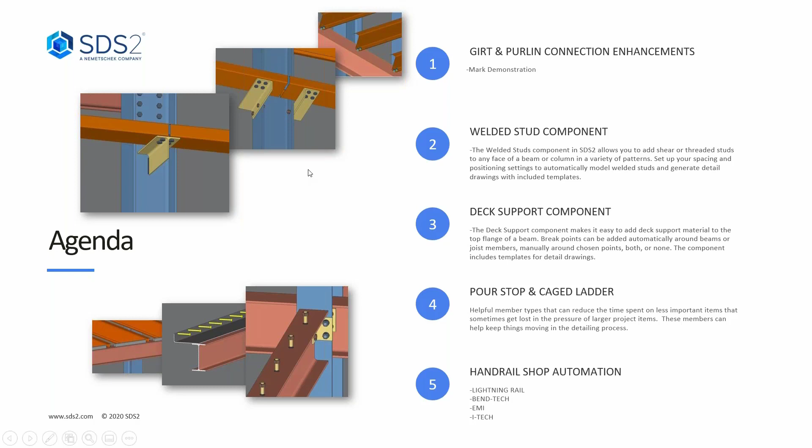To give you an idea, for the Girt and Purlin enhancements, we have all new connections with the Girts. That includes the bolted WT angle, welded WT angle, and welded rotated column flange and toe connections that are really awesome, super versatile, and again everything is really user friendly. For the Purlin connections, as listed, there's the plain and bolted plate, and angle overlap wing plate.

So without dragging this out too long, I'll go ahead and turn it over to Mark for his demo. All right, thank you Nate. Let's get into this.

We will start out by modeling in the new Girt member. I've already offset a line to the building line for the points to pick when adding in our Girt members. When you are modeling in the new Girt member, you will want to model it in a counterclockwise direction around the building. I'll go to my members, add, I have Girt, and I'm going to pick my intersection of construction line to intersection of construction line.

I can come to the section size to browse for what material type I want to use. You are able to use wide flange, channel, cold form channel, and cold form Z. I also have my toe direction here that I can fill out.

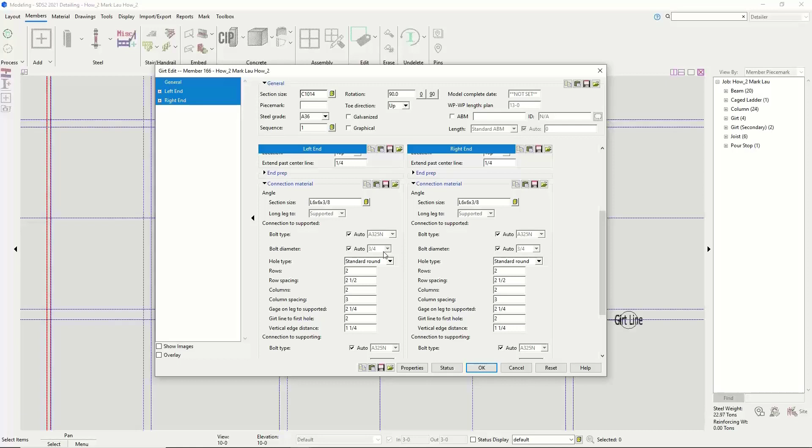Next, we'll come down to the connection type. With the new Girt member, it is not a system design connection, but it is a user input connection, where the user has control on what type of connection they want for the Girt. If I drop this down, we can see that we have angle, plate, and WT for connection types, and we'll look at the different connection types here shortly. You also have options for the attachment, the attached to, and then the connection material, and if you're having bolts and/or welds, you have control of that. I will go ahead and hit OK here.

And then I'm going to continue picking down the line here.

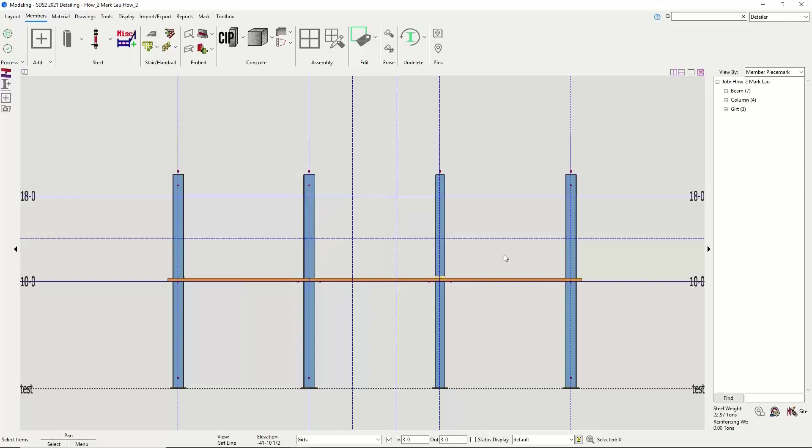And I will leave these the same values I had before. So now that I have my girts in, maybe I want to copy them up to a different elevation. So I'm going to go ahead and open up my grid line, called girt line here. And I can change my selection filter down here at the bottom. I can change that to girts and then be able to select my girts here. And I can copy the members.

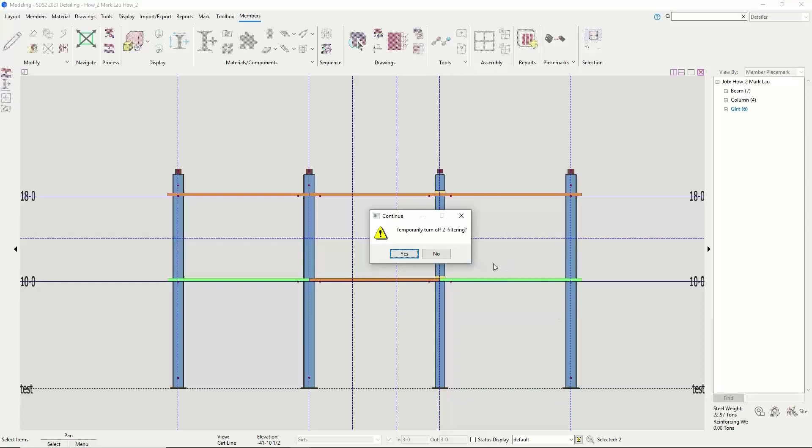Going to pick my point here, and I'm going to go up to my 18-foot elevation, confirm the copy, and then see that I have them here. Now maybe I want to copy just these outer two. And I'll just come up here, confirm my copy.

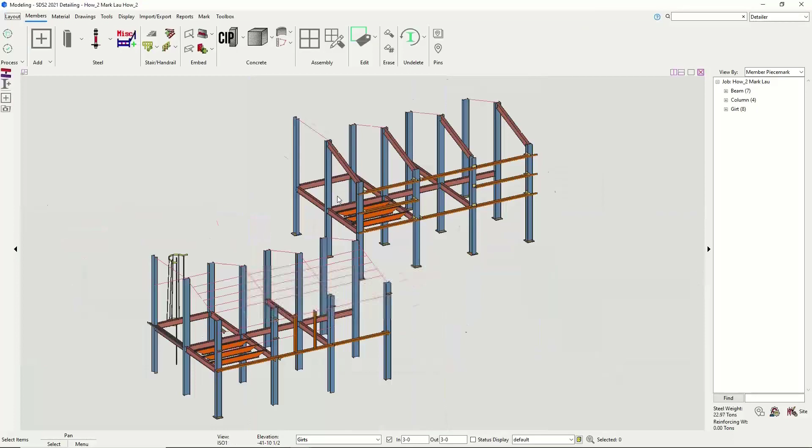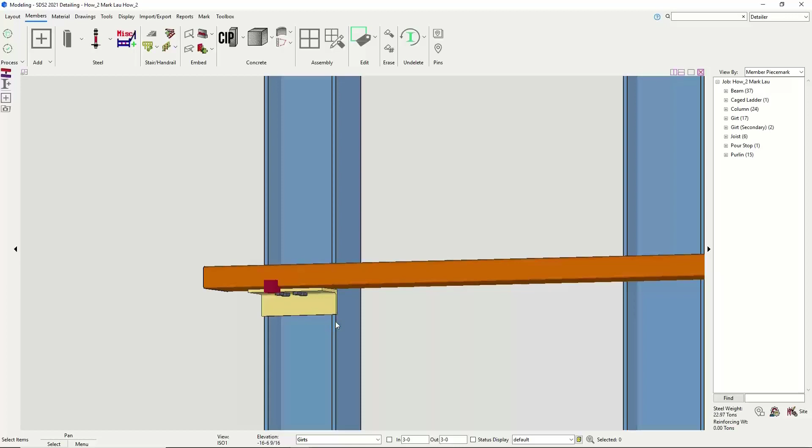So with all of my connection types here, I'm going to open up a different view here to show examples of my different connection types. So I can come in here and see that we do have an angle that is on the bottom side that is bolted to both the flange of the column and the girt. You can control which side of the connection, top or bottom. Here I have an angle that will go to the toes of the column. You can set up the weld type, and then it's bolted here.

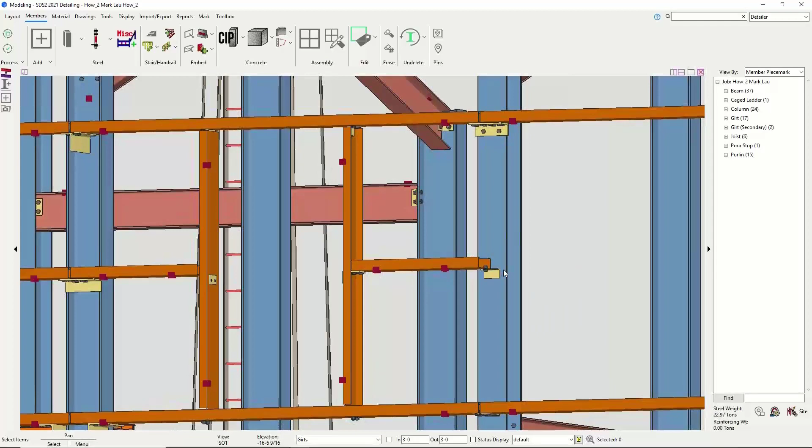Next, we have a WT where it is connected to the web of the column right now, but you can also have it attached to the flange of the column. Next, we have just an angle welded on here for the side. And then we also have a plate connection that you can use. I'm going to go back to the view that I was working in before, my girt line.

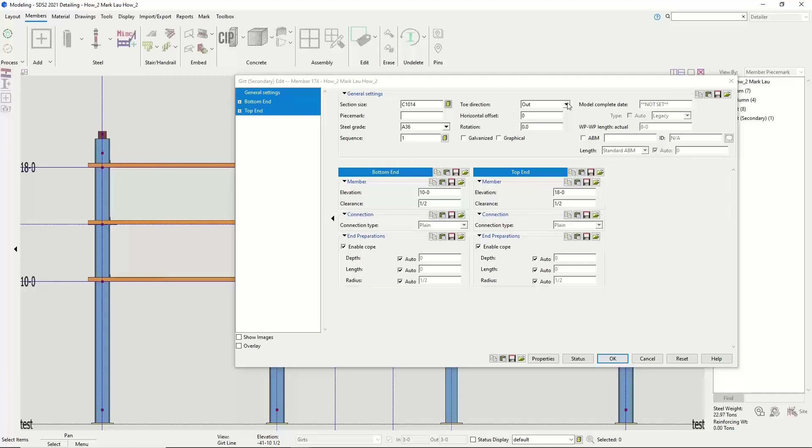And now we will talk about adding in secondary girts. So I can come up here and be able to add in my secondary girt member. And this will allow me to have connections to girts, and then also from girts to secondary girts. So I might come in here and just do the same connection type. For the materials, you have the same as the girt. You have the wide flange, the channel, the cold form sizes as well. You do have a toe direction here, so I'll leave that as out. And then you have your connection information.

And then I'll go ahead and pick my point here again and change my toe direction. So in this case, for my opening, maybe I want to come back here and add in girts to support it here in the middle. So I can just come in like we had done before. Click OK.

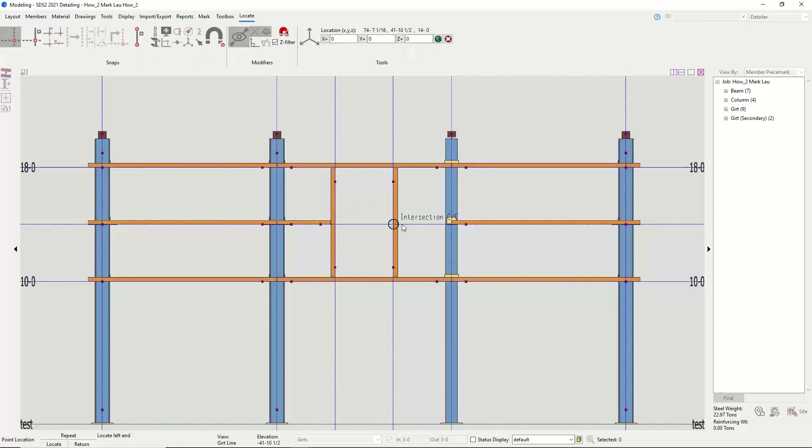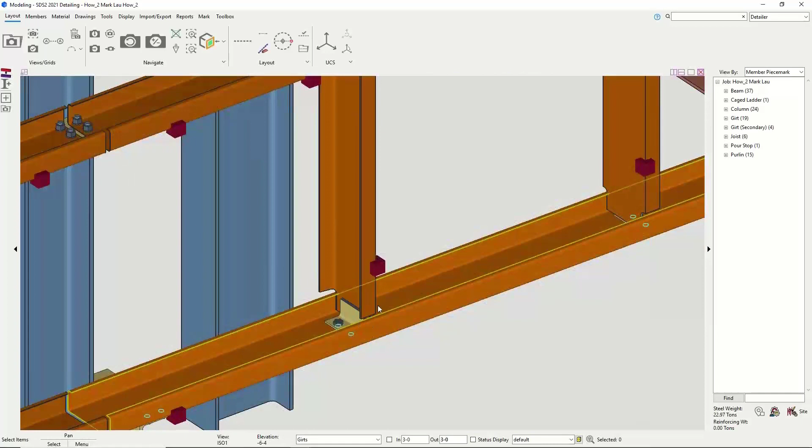Okay, now to show examples again here, I'm just going to open up my ISO view to show the examples where you can see that it does notch out around the girt there for the secondary girt, and I've got a clip angle connection in here, and then I can also get my connection here to my secondary girt.

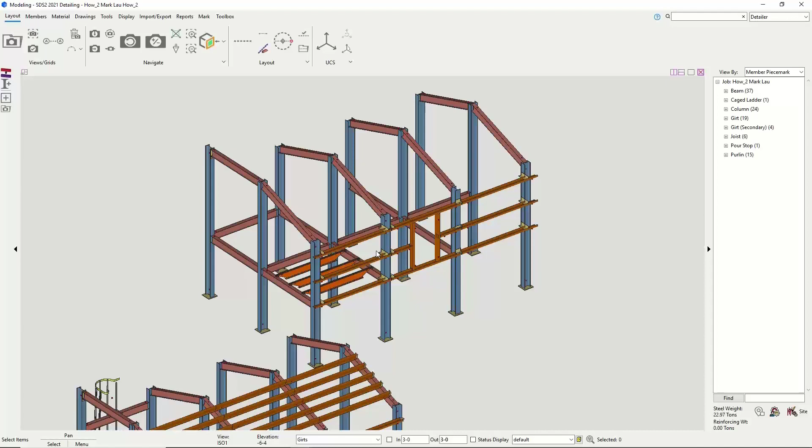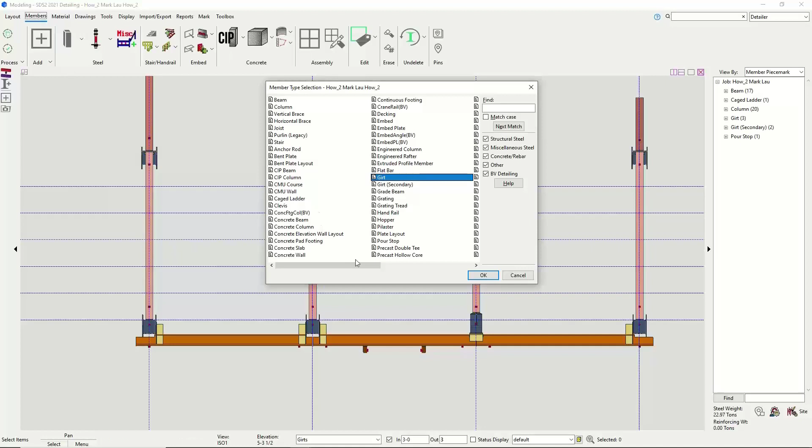Next, we will talk about modeling in the new purlin member. So with the new purlin member, the member line or the points that you pick are going to be on the bottom side of the purlin so that you are picking on top of the beam flange here. I have a sloping roof, so I'm going to snap to the top of the flange to be able to model in my purlins. I will come up here and go to my member add. And I have my purlin member to be able to add.

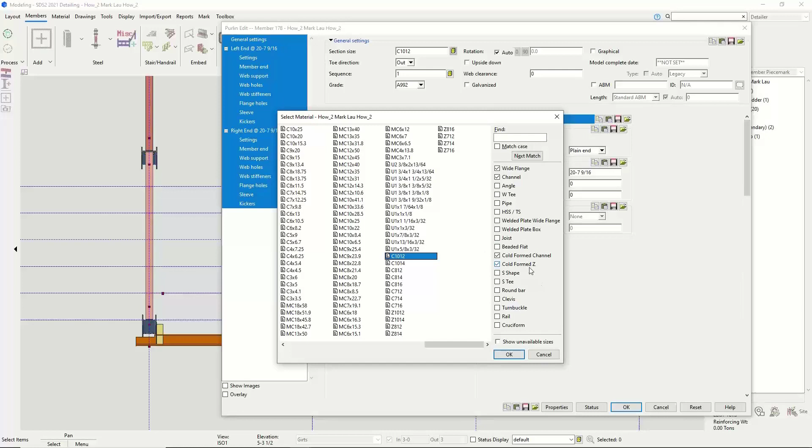And in this case, I'm going to use the point locator of intersection of construction line and member, since I have a sloping beam, to be able to pick my points. For the material types here, I have wide flange, channel, cold formed channel, cold formed Z. I'm actually going to come over here to the Z, click OK. I do have a rotation here for it. I do have a toe direction in or out. And then I have my different connection types.

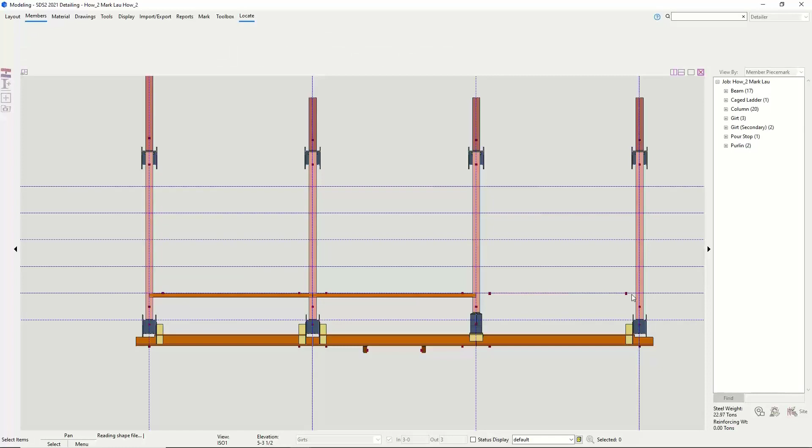So like girt, the purlin member has connection types now. It is not a system design connection. It is a user input connection where you have control over how you want the connection to be. So you have bolted, plate, angle, overlap, wing plate. I will show you some of these examples here shortly. For right now, I'm just going to go bolted. And then I can continue modeling down my bays here.

For the next one, I'm actually going to span over 2 bays and have it go over the top of that beam. And we will talk about being able to connect that here shortly. So I'll just go ahead and leave everything as default like it was before and finish out this line here.

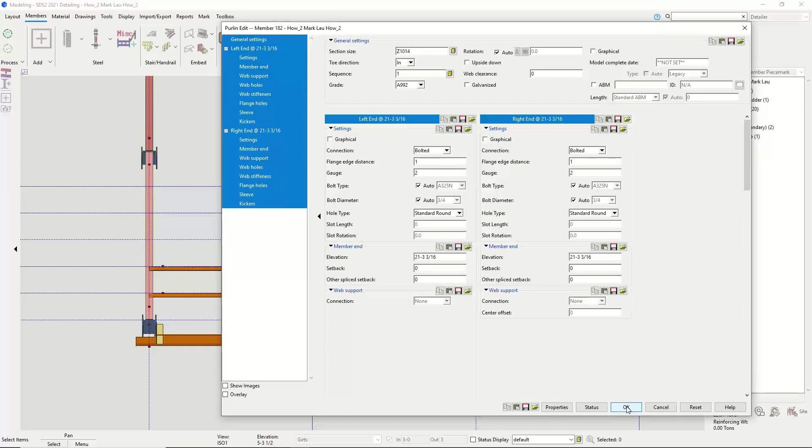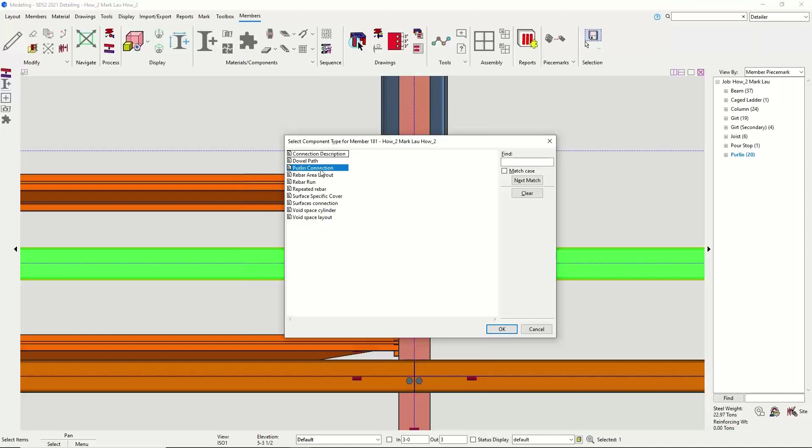So now what I can do is come in here, and if I take off my depth check, you can see that I do not have any sort of connection here. So if I select my girt here, or my purlin, I have the option to add a component. I have a Purlin Connection component that I can add, and then it's going to have you pick a point where you want to be able to add it. And then I have my different connection information that I can do.

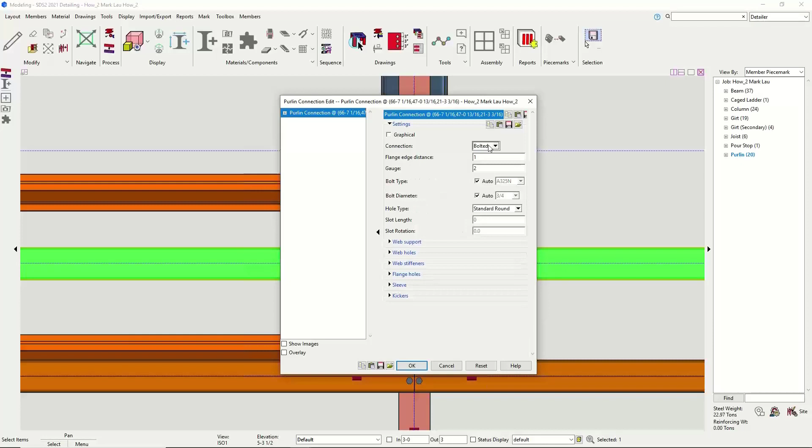So just like in the Purlin edit window, I've got bolted, plate, angle, and then you have some different options that you can use there. So I'm going to leave mine as bolted. Go ahead and hit OK. And you can see that I got my connection bolted in here.

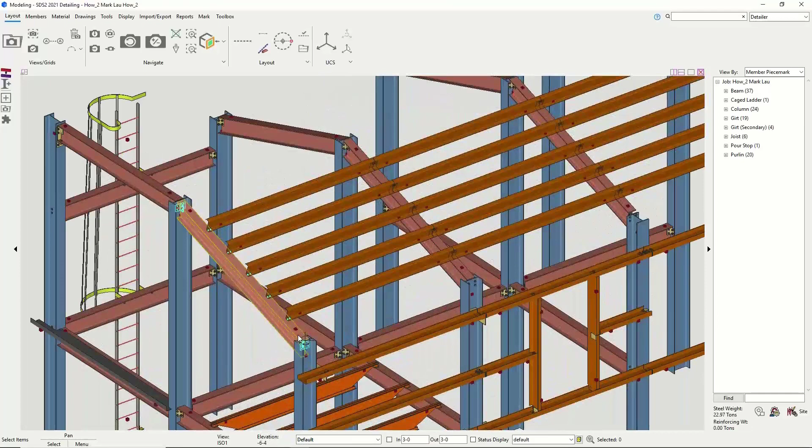So to be able to show some different connection types here for the purlin, I'm going to open up a different view here and just talk about some different ones. So I've got the bolted like shown before. In this scenario, we have the plate connection for the purlin. And then down here at the end, we have a wing plate that you can use for the end of the purlin there.

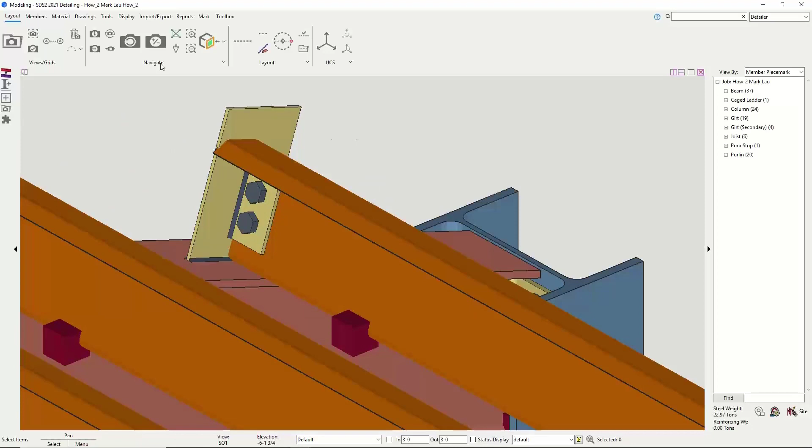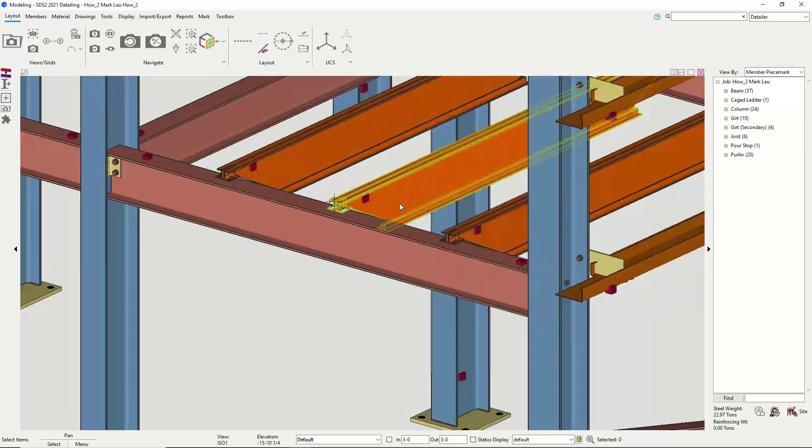Next, we are going to talk about adding in the deck support component. So I'm going to come in here, and in this situation I have my beam and I've got some joists where I need to have that deck support put in. So I will select my beam, and then I can do my component add, and I have deck support.

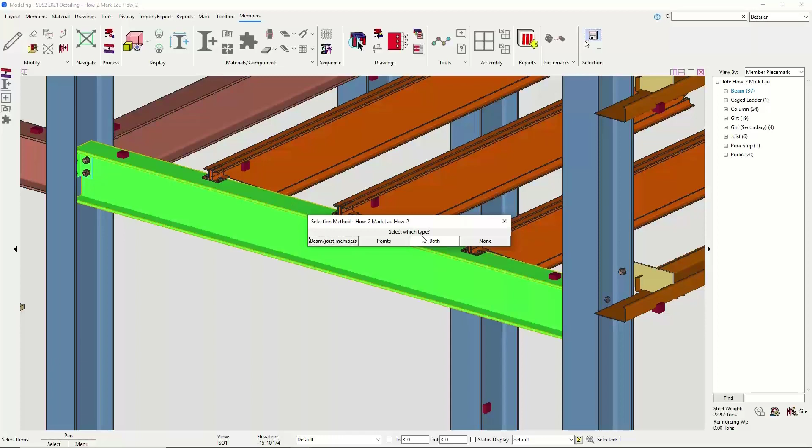Now what it's asking is select selection method for beam joist members, which means that I can select if there's any beams or any joists framing into this beam that I selected. This is where I can have the split of the deck support. I can do points where I can just pick my points for how long I want it to be, or I could do both, where I'm selecting them, but then I'm also picking my points for where to start and where to end. For right now, I'm just going to pick beam joist members, and I will pick my 3 joists.

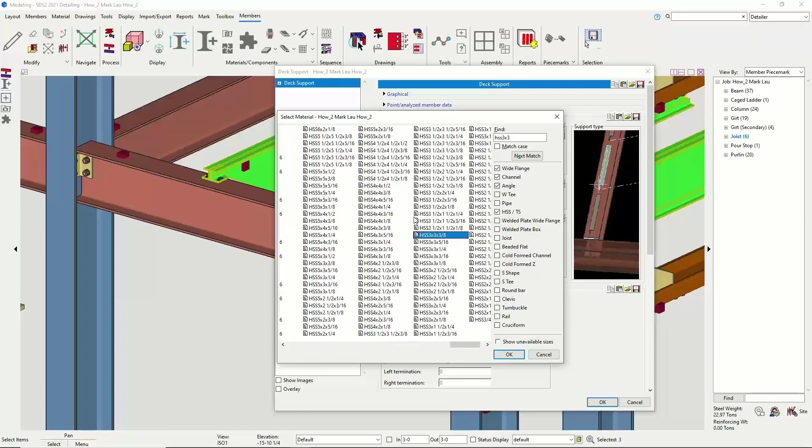Now, when I come in here, I have section size that I can pick. You have the option of wide flange, channel, angle, or HSS. So maybe I want an HSS. 3x3, I'll go maybe with the 3/8.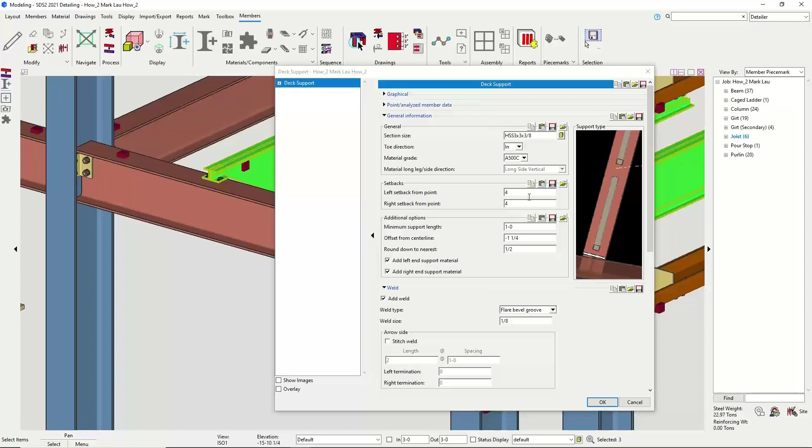And then next I have my setbacks. So this is where the splits are. So from the splits, how far back do I want them to be set. So currently they are 4 inches, where I can control that, and then I also have weld information that I can control. So if I hit OK here, it knows where these joists are, and then it is having a split of 4 inches here for each end. And with this component, I can edit it and change any of the information as I'm going back through.

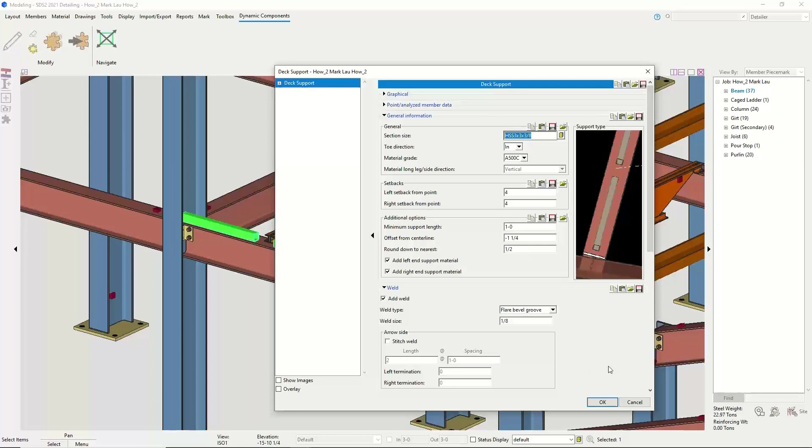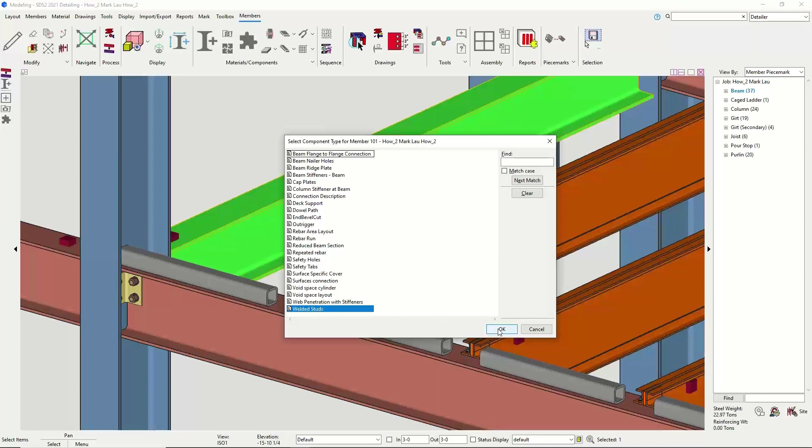Next, we are going to model in some welded stud components to show examples of this. I'm going to select the beam again and go to my component add. And then at the bottom, I have welded studs. Go ahead and hit OK here. I have 2 different stud type options that I can do. I can do a shear stud or a threaded stud. And if I pick a threaded stud, I do have the option to add a nut and washer.

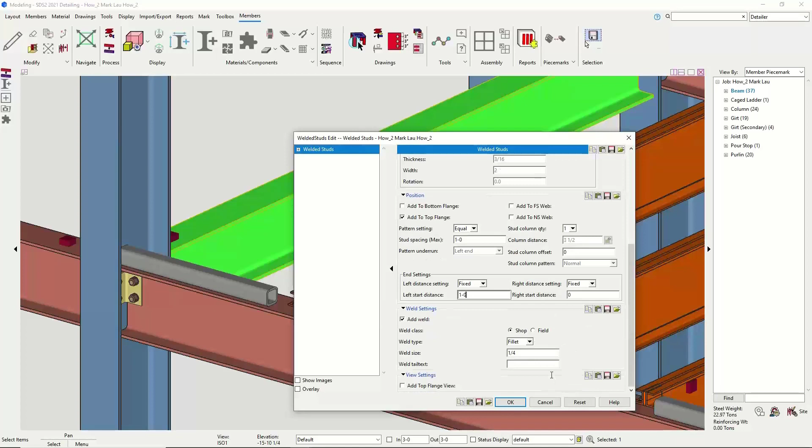Next, I have my position. So I can have them be on top flange, bottom flange, or I can even do the webs here, depending on what you're needing to attach to that beam. Next, I have my pattern setting. So I can do an equal spacing here of maybe 1 foot spacing. And then I have my end setting here where I can do a fixed spacing. Maybe I want to start 1 foot from the left end for my options. And then I have my weld information here.

So now that you can see I have my 1 foot spacing, I have a nut on here. Now I have a couple different options here that I can change. So maybe I want to come in here and be able to have 2 columns for the stud. So I can go ahead and hit OK here. And you can see that I have 2 columns for my studs.

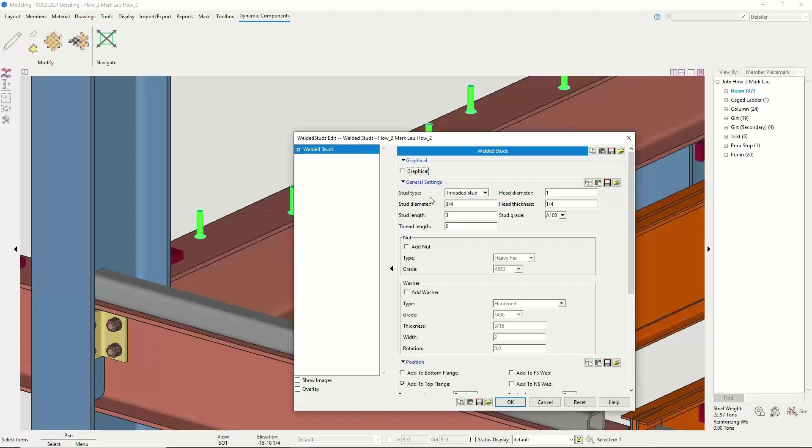Another option I have here when I set my column quantity to 2 is instead of normal, I can do a stagger pattern to be able to stagger the welded studs. And I'll just show an example of the shear stud.

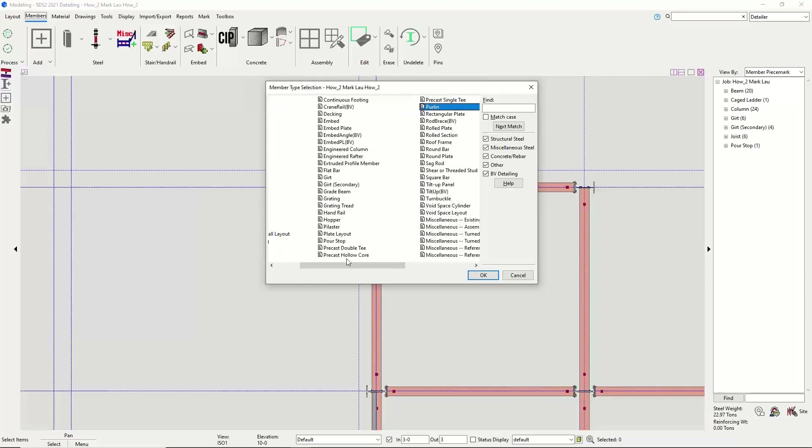Next, I'm going to add in the pour stop member. So I'm going to add it to the top of this beam here. I snap to the beam. I already have some construction lines laid out. So I'll go up to my member add. I have my pour stop member. I'm going to go past here for my first member.

In the pour stop, we have the options for your different pour stop type of bent plate Z, C, angle. I also have my end preps to where I can cope around columns here in this situation, or if I want to do any sort of preparations here for the vertical leg or the horizontal leg.

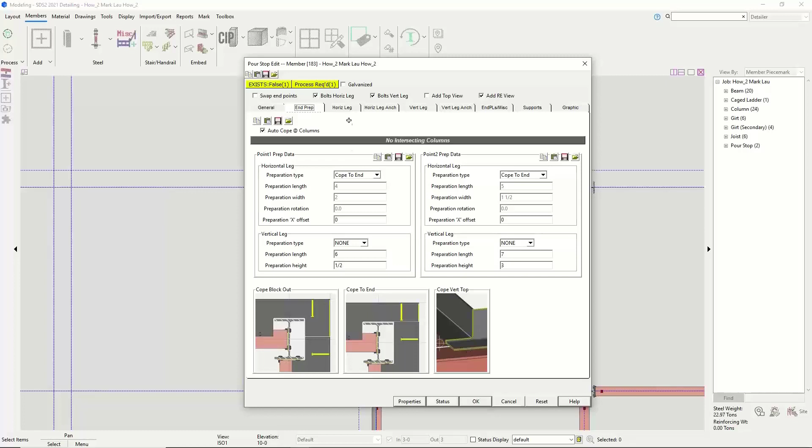Next, I have my horizontal leg information, so I can add holes to the horizontal leg. I can also add stud anchors. I have my vertical leg information. I have my different hole types. I also can add in studs, DBAs, or material bolts to the vertical leg, and control where they're placed at.

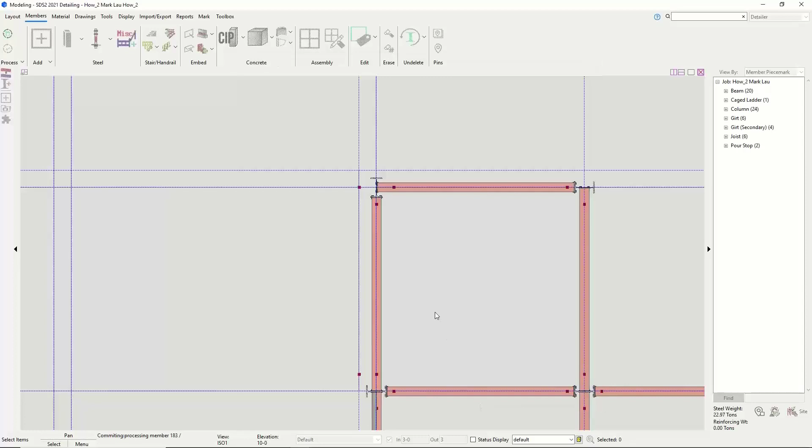Next, I have end plates, or kind of the cap plates here. I will go ahead and add in a cap plate on the left end of this member. And I'm going to go ahead and add in another one here going around the corner. And I'm going to go to the end plate here and take this off, because it's going to be in the corner there. Maybe I'll cap this.

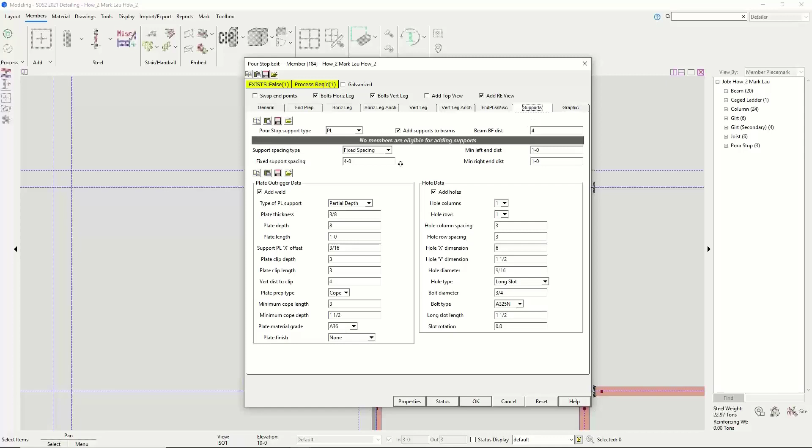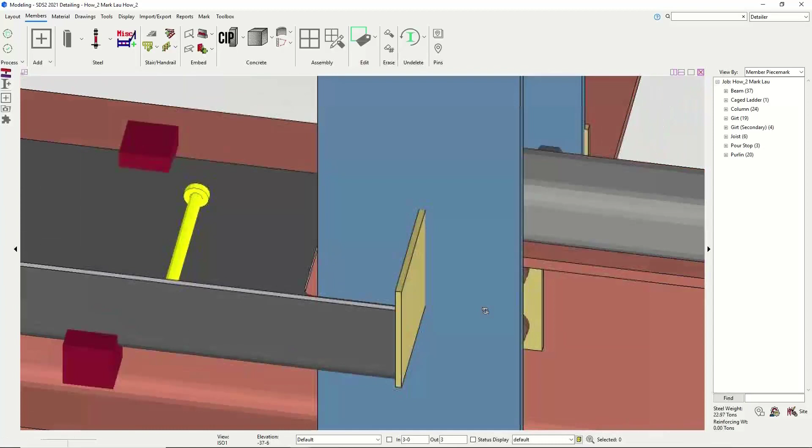We do also have the option for supports for that. If I bring up the graphic here, you can see where they're talking about the supports and how they're put in. So now you can see that I have my studs here. It put a capped plate here on the end.

If I want to, I can also change that to a nested one to be able to show how it's nested in here. You can see how it's coped out around the column. I have my studs. Here are the supports.

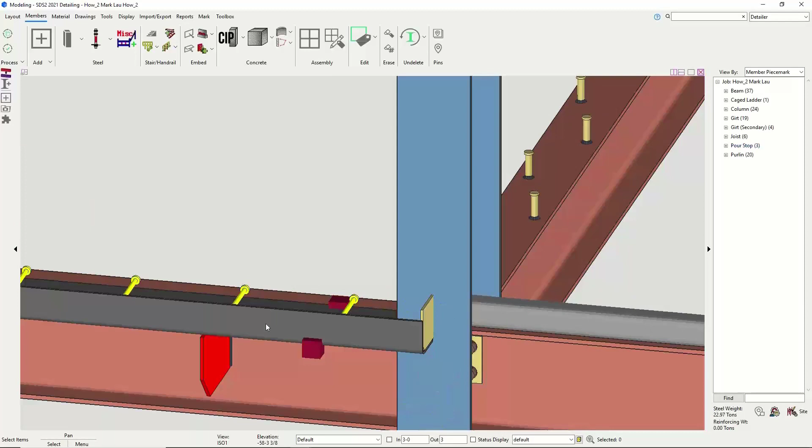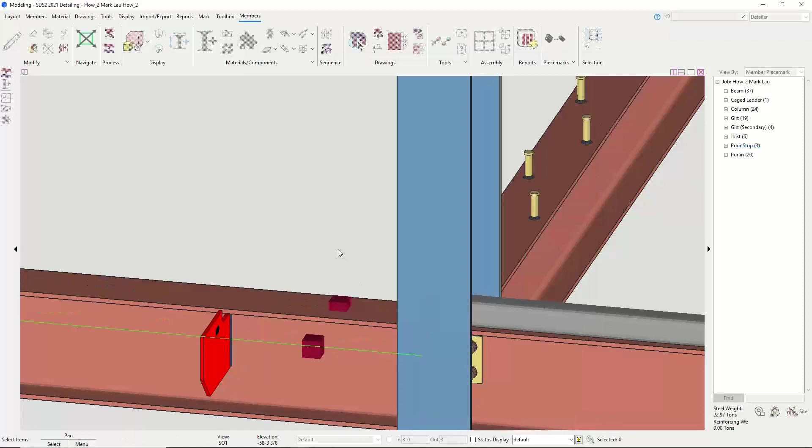If I want to turn the supports off, maybe I want something different than the studs as well. I can come into supports, turn off add supports. I may come back to my vertical leg anchor, maybe change this to material bolts. You can see that my supports are gone and now I have material bolts that are added in here.

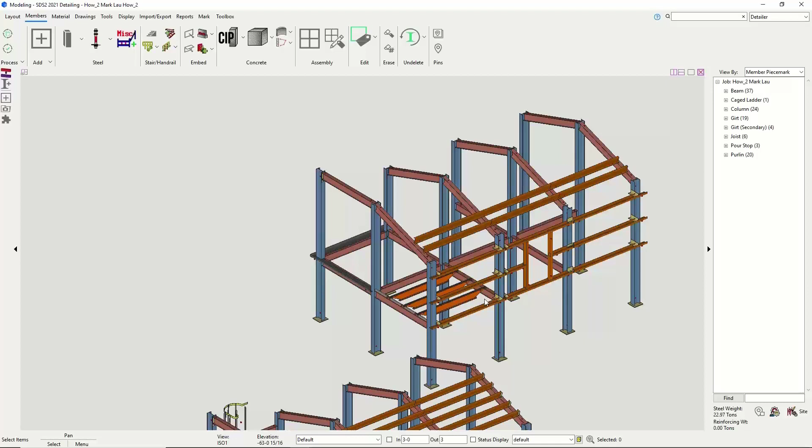With adding in these new members here and adding in the components, one custom member that I want to show here again, there have not been any new features to it in 2021, but just want to make sure that we do know that SDS2 has the caged ladder member that you can add in here.

Now that that's done, let's pass it back over to Nate and he'll go over the handrail.

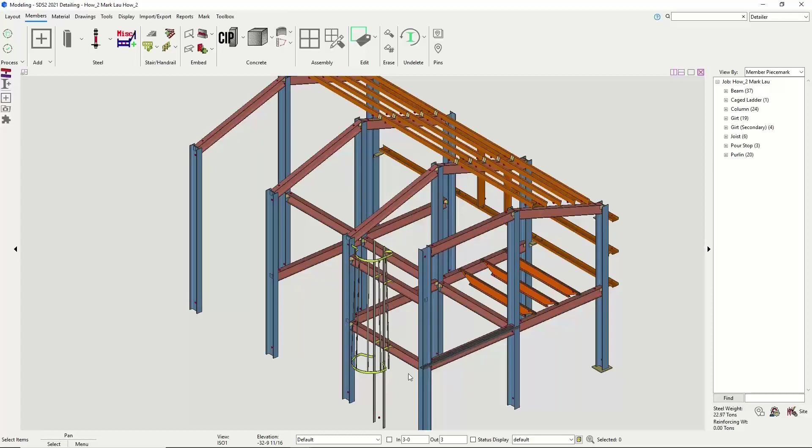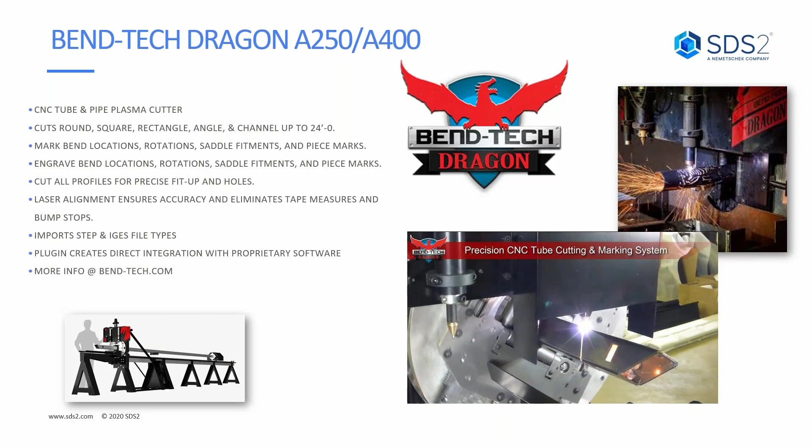It's another CNC tube and pipe plasma cutter. It handles various materials, anything from round, square, rectangle, angle, and channel, everything up to 24-foot lengths. And it's really awesome. It's able to mark all your bend locations, rotations, saddle fitments, piece marks, as well as engrave that same information.

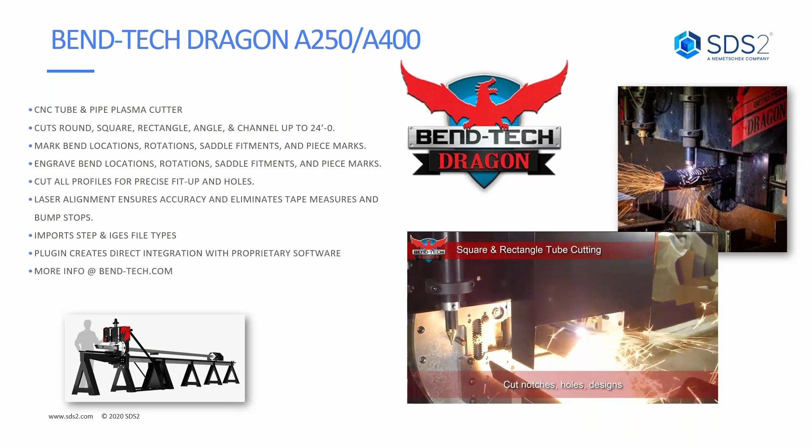So really awesome time-saving marking there, as well as being able to cut every profile so that the guys in the shop can have a really easy fit up on all those different materials. None of that jagged edge stuff that's going to create larger gaps in the fit up process, as well as a laser alignment.

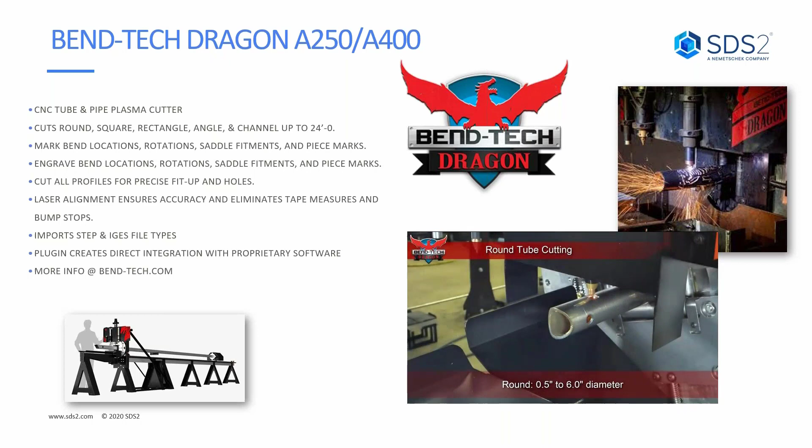No more having to hassle with the tape measures and bump stops. So again, just really great technology, really cutting down on the human error side of things. And then this is done easily just by importing a STEP or an IGES file. And we have a separate plugin through their proprietary software that automatically reads SDS2 files.

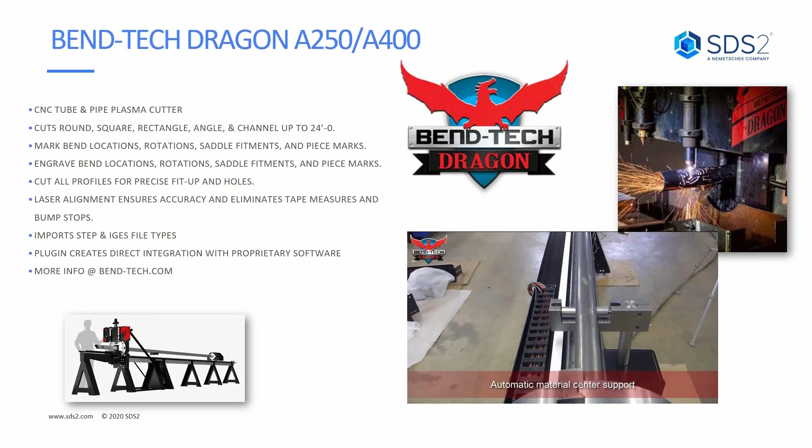So next up on our list is ITEC, and they're just another bending machine, and it just takes the NC or CNC file and incorporates the geometry into the machine basically through 3 easy steps. What they do is they just take the IGES file from SDS2 and then they combine it as a single component in their software, which is called TubeWorks. And then from there, they export that CNC file to the tube bender, and the tube bender then makes the necessary bends as needed. So super slick process there in 3 easy steps. So pretty cool stuff there.

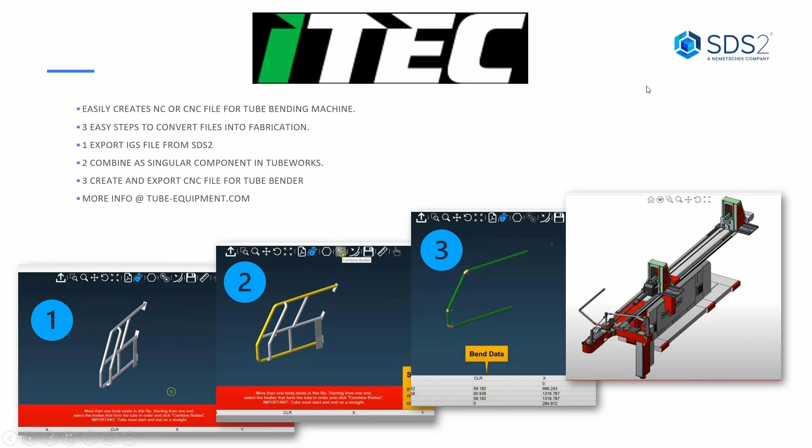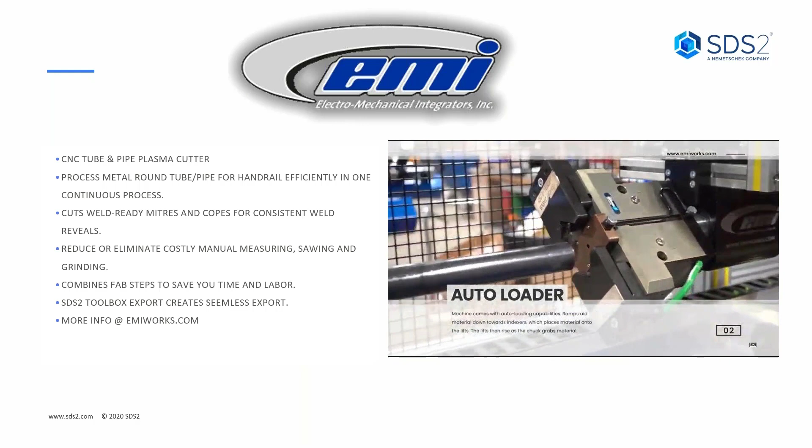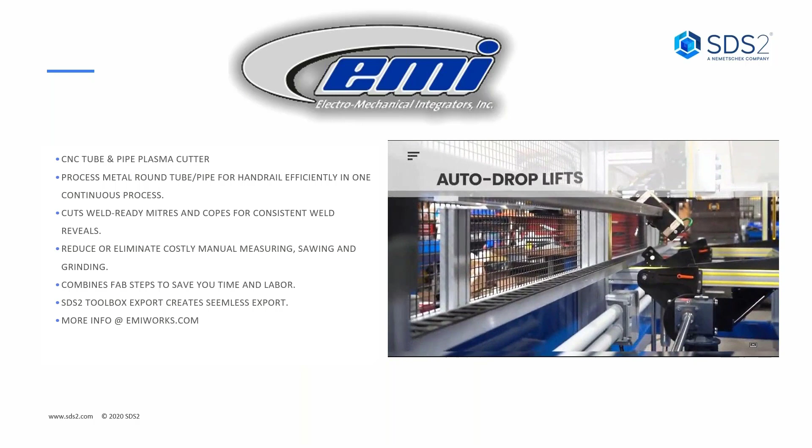Next on our list is EMI. And I'll go ahead and get the video going here. And EMI, again, is just another CNC tube and pipe plasma cutter. And they can process tube and pipe material all in one quick, fast process. And again, they're very similar to Bend-Tech, where they're able to fit, cope, and miter all the different marks on the material. Again, reducing the costly manual measuring, as well as sawing and grinding. And this combines the fab steps to save you a ton of time and labor.

And SDS2 actually has a toolbox item, which is a direct export that creates that data file for a really seamless, effortless way of getting that data to the machines as needed.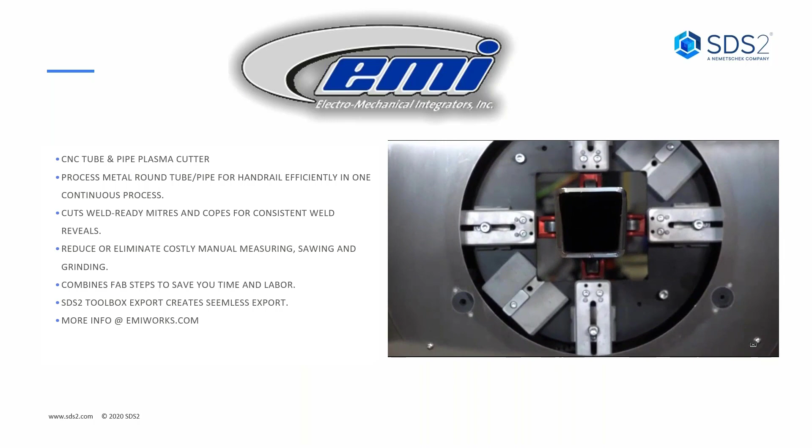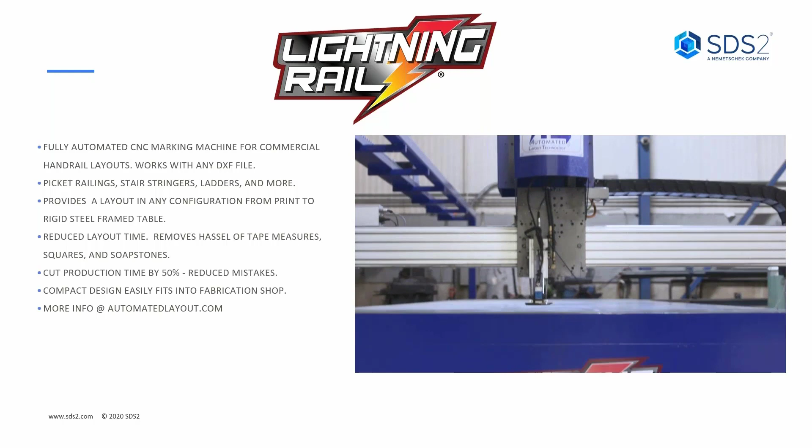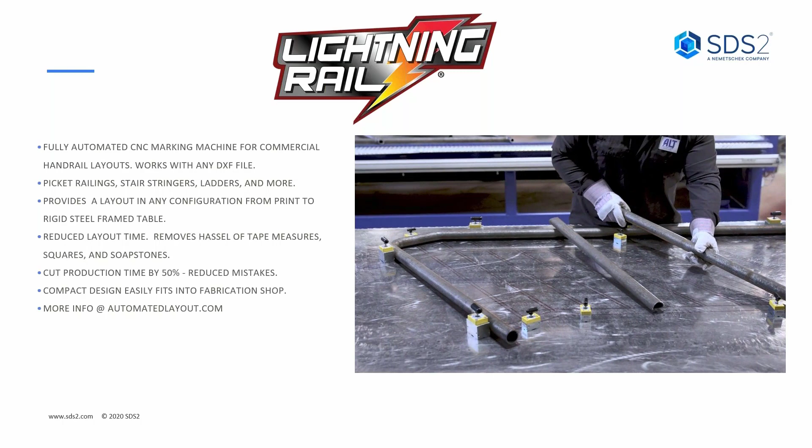And our next one is Lightning Rail. These guys are a fully automated CNC marking machine for commercial layouts. And this is all done through a simple DXF file export. And really where this machine would shine is in combination with any of your other robotic handrail machines. So if you do have one of those coping machines or bending machines, this machine is going to do a really great job of doing that layout on the table for you with all those parts that you just fabbed.

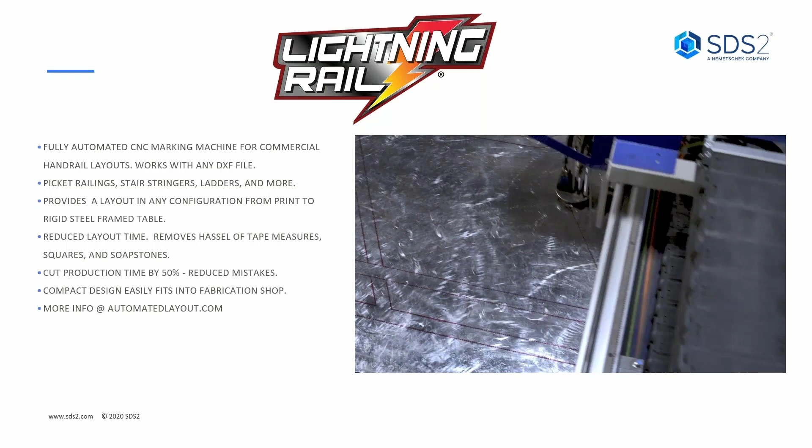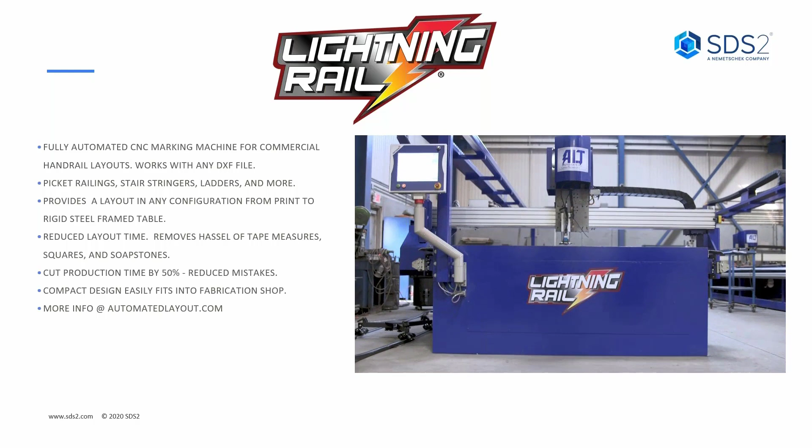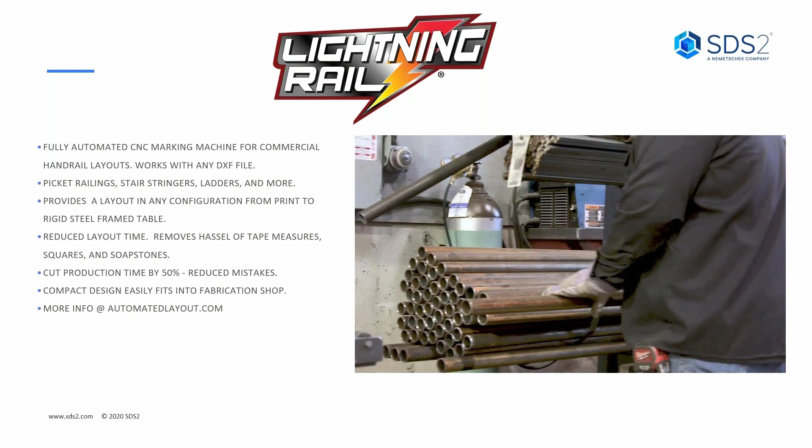It's going to lay out everything from your picket railings, your stair stringers, ladders, and it just kind of makes it an error-free process, greatly reducing your layout time. So totally removing the hassle of tape measures, squares, soapstones. And they're saying that this can really cut down on your production time by 50%. So that's a super huge amount of time and money for sure. And again, it's a real compact design that fits into your shop process.

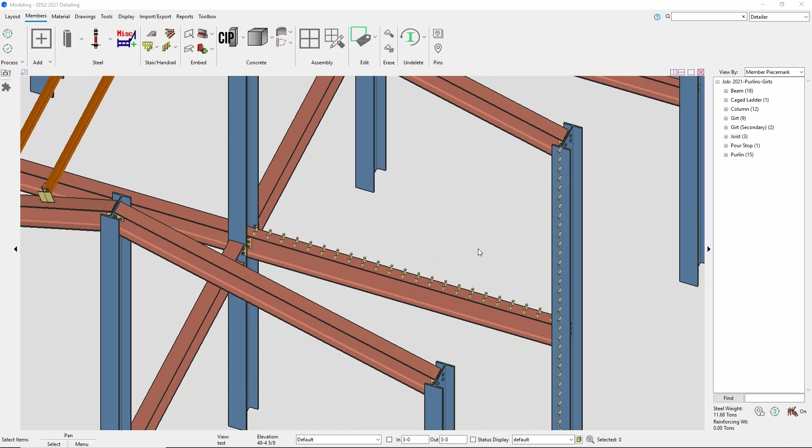Here's a question - bolted pour stop. Can we do bolted pour stops, Mark? We would currently - the attachment there, let me pull this up. Let me look into that and see if we have another question here, Nate.

Yeah, no problem, it's fine. And I'm just checking here.

What if we needed more than 2 columns of studs on top of a beam? Currently, we do not provide more than 2 columns of studs for that component. I can definitely put in an enhancement request to have more than the 2 columns there.

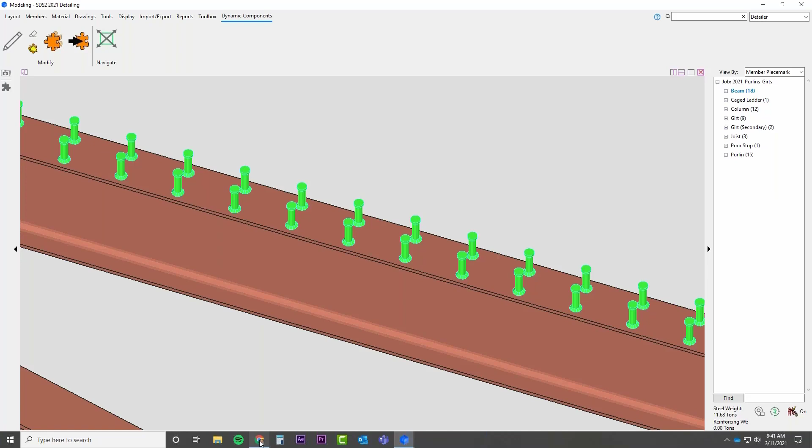Another question - somebody's asking about Vortman Machinery. If you guys are ever curious who we're working with, we are always open to working with any industry partners that benefits everyone, both our customers and us, to work with as many machinery companies as possible. It's kind of a two-way street, us reaching out to them and them reaching out to us. We will never turn somebody away. With most big names in the industry, Vortman being one of them, yes, we do work with them. As far as webinars, demonstrations, things of that nature, it's just a matter of coordination, and not everybody's schedule is always open for both parties. So there's always a process to that, but we're always open to working with anybody.

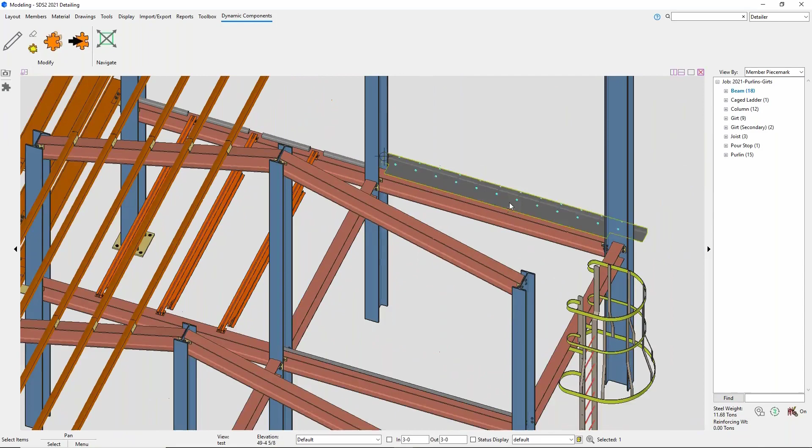Nate, to go back to that original question about the pour stop being bolted - yep, we do have the option where if you have your horizontal leg, there is an option to add holes. And if you add the holes, there is an option to add bolts, to be able to bolt that to the beam if you've got the pour stop on top of it. Okay, awesome, thanks for looking into that.

All right, and I think that's a lot of repeat questions here on pour stop, so I'm going to go ahead and close down the questions now. I hope we answered most of them.